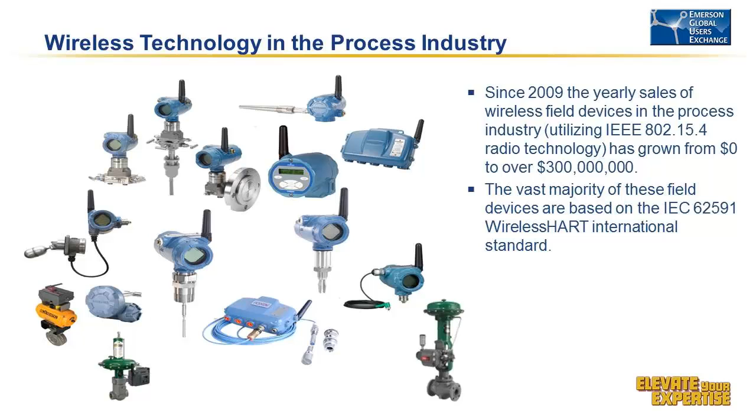Essentially, that market has gone from about 0 up to $300 million per year in a 6-year period of time. There are very few technologies that have taken off that fast in the industry. Part of that success is due to the fact that wireless and the way the gateway works makes it fairly easy to install, and it's fairly forgiving in terms of the installation.

If you have a straight line of sight, you can go quite a distance, but you don't have to have straight line of sight. You'll be hearing from Bailey about what's been done at UT, but you look at the installation there on wireless, and the gateway is in no way straight line of sight to any of the transmitters. There's quite a distance and obstacles in between. One of the nice things is with wireless you have reflection of the actual transmission that's going on, and through those reflections you really can get to points that aren't in the straight line of sight.

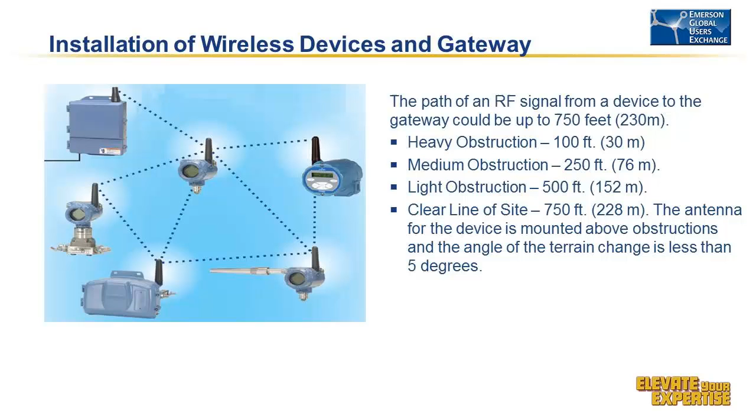When you look at wireless and you start setting up your wireless device, there are some choices in terms of communication. And if you're thinking about using that device in closed-loop control, then the two primary candidates for communication are something called the continuous communication. That means that the device wakes up periodically, senses the measurement, then communicates that, and then goes back to sleep. And it periodically then wakes up. The period that it wakes up, you get to specify. So that's your configuration parameter.

The other technique that is often used in control is window. It's similar to continuous in that the device periodically wakes up, but then at that point in time it says, has my measurement changed by more than a certain resolution? And if it hasn't, it doesn't communicate it unless it's been a certain period of time since the last communication. So that's called window. It always uses less power than if you're doing continuous. But one of the considerations is with window, you now have aperiodic communication of your measurement. And so your control has to be structured to be able to handle that.

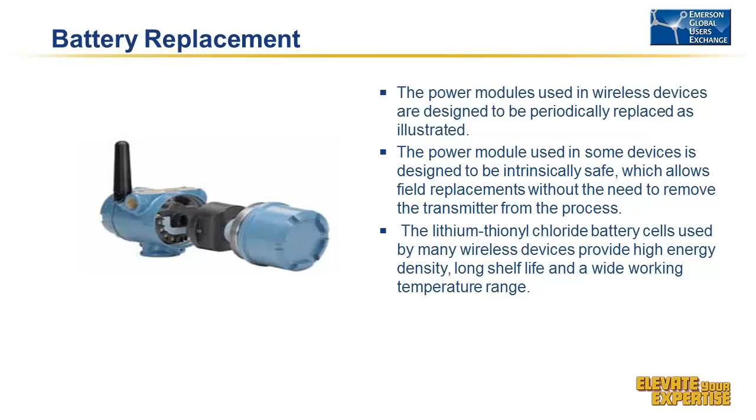Most of the devices out there today are battery powered. In terms of thinking about battery powered devices, this period of communication has a direct impact upon the length of time you can operate with that battery before you need to replace it. An awful lot of people that I've talked to have said they really want the battery to last 5 to 7 years. So if you look at this, you'll see that you really need to be setting up communication for about an 8-second periodic update if you're trying to achieve this 5 to 7 year battery life.

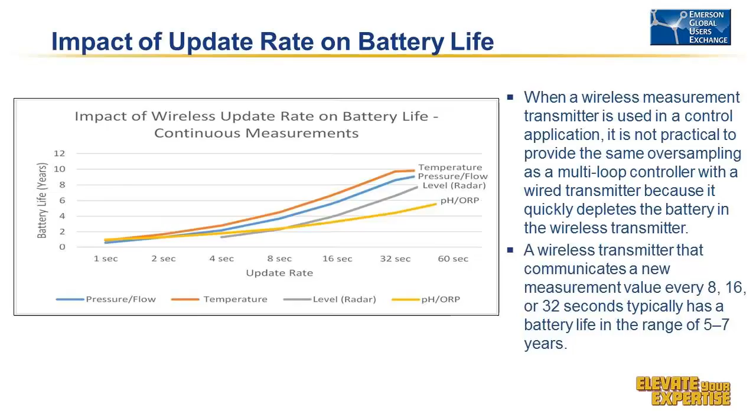Now, an 8-second update is quite a bit slower than what you have in your control system today. The recommendation is that over your process response time, that is the time from you making a change to getting to 63% of the change, you at least execute 4 times in control over that time frame. And in most of your DCS systems today, to minimize the delay between the measurement being taken and being used, we highly oversample the inputs.

So like in DeltaV, your analog input is being updated by your HART transmitter over 20 hertz, so about every 50 milliseconds or a little less. In DeltaV, the I/O on that is updated about every 50 milliseconds. So when the actual control executes, there's very little delay introduced by I/O access. But if you said, well, now I want to set up my wireless to do the same thing, you'd burn out your battery in a few days just due to the power that would be required.

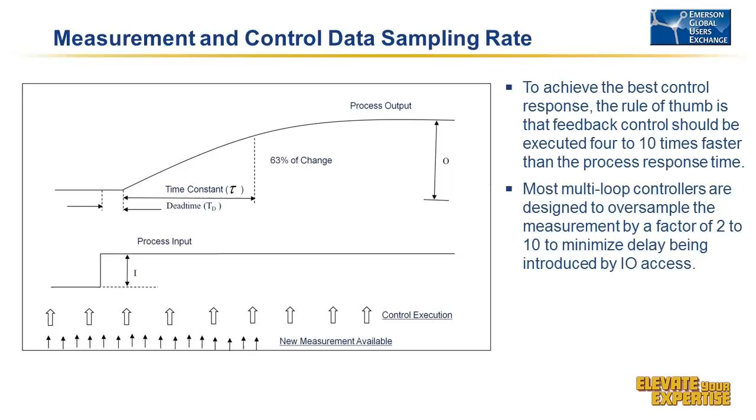So if you have a slower process application, though, where this 8-second update is giving you 4 updates over your process response time, then you see just using a regular PID, it doesn't do such a bad job. Okay, so let's say you had a process that was 30-some-odd seconds response time, then with an 8-second update period you could use regular PID and get away with it.

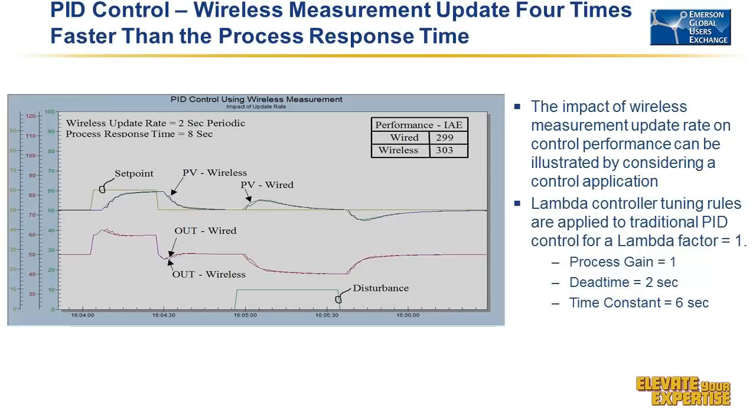But if you said, well, I really have processes like liquid flow, liquid gas, other things that are much faster, and you take the case where maybe your update is 2 times slower than the process response time. So let's say you had a liquid flow loop that's a 1 second response time and you're communicating it every 2 seconds. Then if you have it properly tuned, you look like this. Not so good.

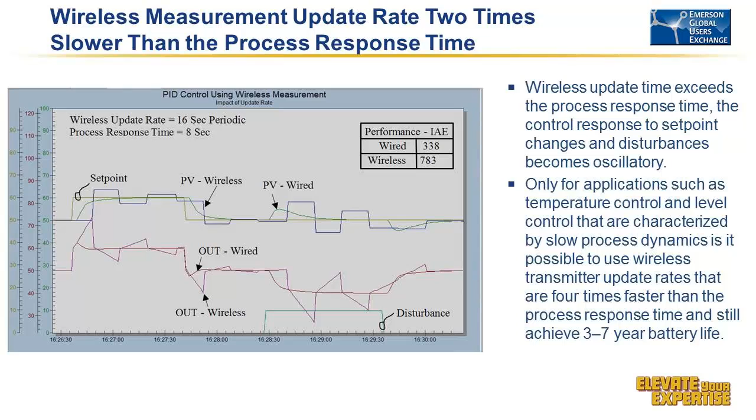Okay, so what do you do? Well, what I tell people is that up until now, the DCS has been designed and your I/O access with wires been designed where we could very successfully mimic analog control. So up to this point in time, the technology has been just designed to mimic analog control.

When we get into wireless, you really need to talk about a different control structure. And fortunately, there is one. By looking at the PID and looking at the way the reset is calculated, the derivative is calculated, you can restructure the PID to give you something called PID Plus capability. That means that your reset contribution and your derivative are only updated when you get a new communication. Your proportional continues to operate all the time.

Now, when you deal with this new technique, the actual PID needs to execute much faster than the actual communication rate. So if you had an 8-second update, you may be executing this every half a second, say. And the reason for doing that is to minimize the amount of delay you introduce into control. So as soon as the new measurement is in, you're using it. And so that's an important aspect of applying this PID Plus.

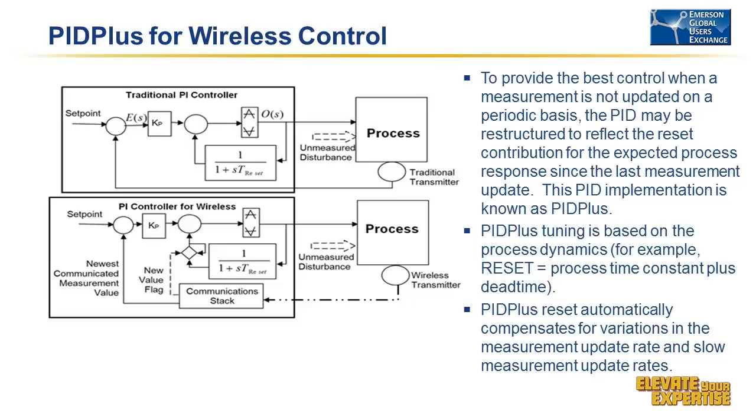But if you apply PID Plus, I think you'll find it gives you very comparable performance to what you get with a wired system. In this case, we're talking about using windowed communication, non-periodic update with a 1% resolution, really coarse update, 10-second refresh time, and yet you notice on a set point change, response looks very close to what you get with a wired. So we're comparing a wired transmitter with PID to wireless with PID Plus here.

You notice though on an unmeasured disturbance, it doesn't do quite as well in terms of recovery. But you notice every time you get a new measurement update, you're right where the valve would have been if you had had a wired installation with PID. Okay, so it does a good job. Not quite as well as you would get with a wired installation if you compare like integral absolute error.

But the important thing here is that in this example here, we only had 25 wireless measurement updates. With a wired installation, we had over 600 updates. So it shows that you can do an awful lot with fewer communications if you structure the PID in this manner. A concern oftentimes is loss of communication.

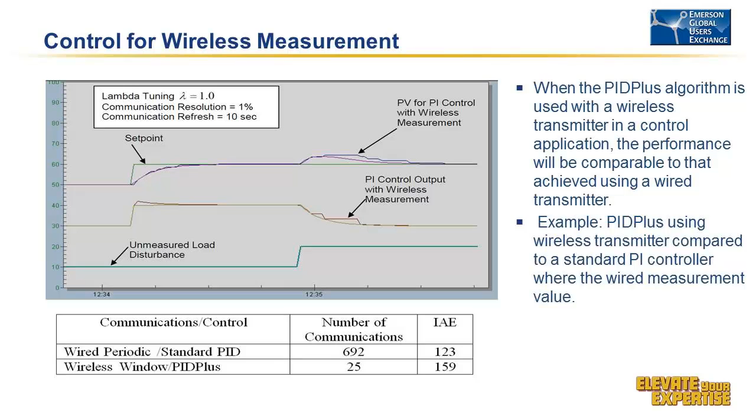So if you lose communication, the PID Plus really outperforms the PID because the PID, under the condition of a lost measurement, just continues to ramp the output with the reset action. With PID Plus, since it only updates reset contribution when you get a new measurement, it only updates or changes with the proportional error in terms of the output. And so it provides really superior performance on loss of communication.

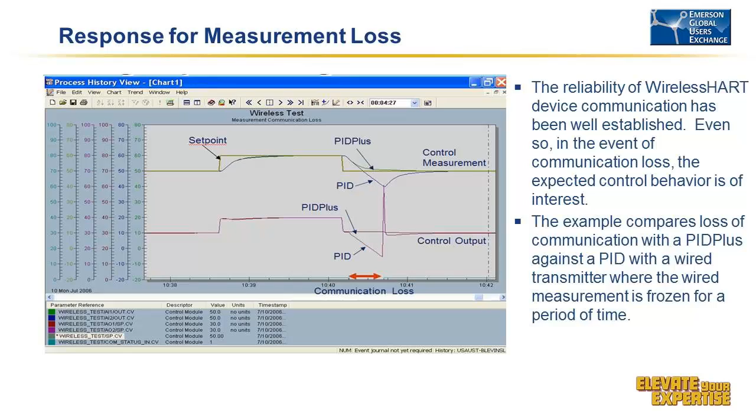PID Plus is a standard feature of DeltaV. So if you have DeltaV version 11, version 12, then it's just the PID option. You select PID Plus, and now suddenly you have that capability. So it's that easy in terms of turning on that capability.

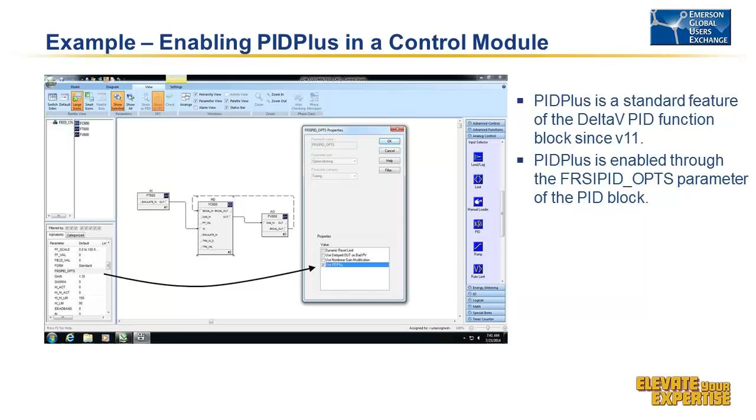But we wanted people to be able to use this regardless of what control system they had. And that's really in the best interest of our measurement division. They'd like to sell to anyone, no matter what system they have. So the patents that we have, and we have 3 patents on the technology, were given to FieldComm last year. That's the organization that really represents Foundation Fieldbus, HART, WirelessHART. So what that means is that as an end user, anyone can apply PID Plus without violating our patent as long as you're using WirelessHART for the transmitters, the field devices.

So after this announcement, I was approached by one of our major oil companies in upstream oil and gas. And they wanted to try this because they saw a lot of value in wireless control for upstream applications. The problem was in their research facility in Houston, their flow lab had LabVIEW as the control system. So I said, well, we'll work with you and we'll implement that in LabVIEW. So that's the sub-VI, the sub-virtual instrument that I created. That is PID Plus, 20 lines of code, to do PID Plus.

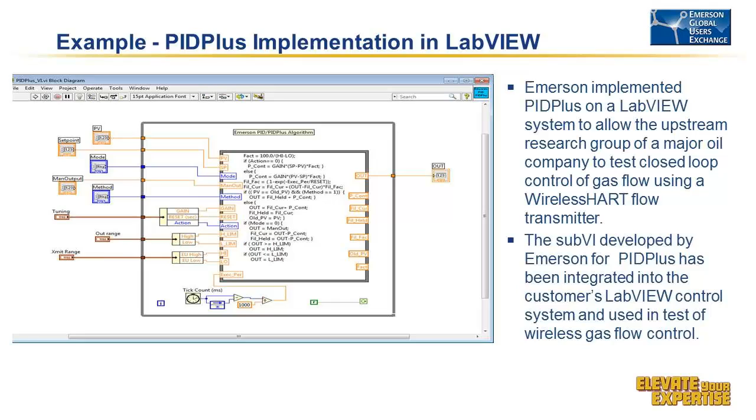So we gave that to them. They installed it in their flow lab. They tried it on a gas flow loop that had a response time of less than 3 seconds. They control that using 8-second update, continuous update. And this is the response from their flow lab. Okay, so that's for set point changes.

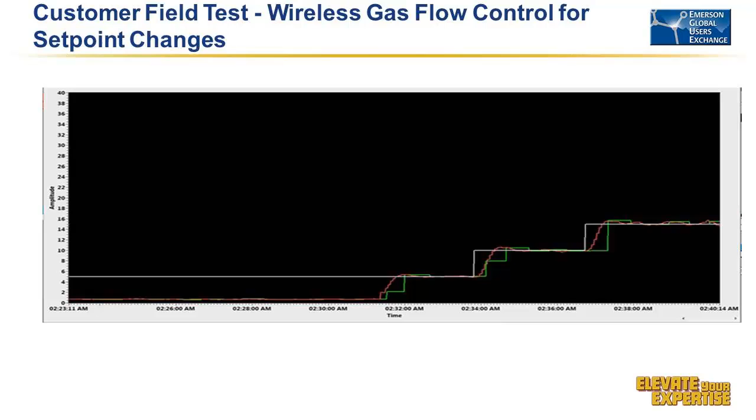So with this gas flow, they could introduce header disturbances. And so that's what they did to test disturbances. So that's the disturbance response. Not too shoddy there. So as a result of that, they've asked us now to implement PID Plus in the ROC platform, because they have standardized on ROC. And so Eric will be talking about that in terms of that interest in having that in the ROC platform.

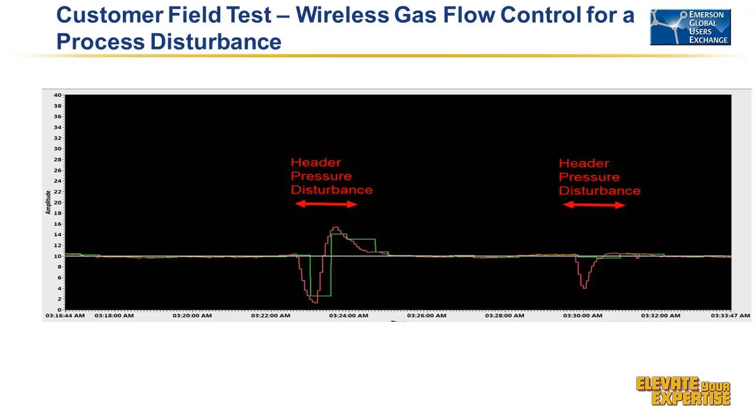Okay, so all this is sort of leading up then to guidelines, background information, understanding why the guidelines are there. Basically, if you're using a wireless transmitter and you want a 5 to 7 year battery life, you need to stick with about an 8-second update rate. Okay, so that's a recommendation.

The module that you're executing, the control end, should be executing much faster than that update rate. You don't want to introduce delay due to the fact that the measurement has come in, but the control isn't going to execute for 3 or 4 seconds, right? You want to take immediate action upon the new measurement as soon as it comes in. So we've sort of flipped the cart here. Previously in DCS, we were oversampling on I/O and executing control slower. Here we're executing the control extremely fast because the I/O is coming in at a very slow pace.

I would only recommend you use wireless if you don't have a requirement to respond to disturbances faster than your update rate. So let's say you pick 8 seconds and you tell me, Terry, if I have this disturbance, I need to respond in 4 seconds to it, then I'd say don't use wireless. Not a good candidate, right? But fortunately, for the vast majority of our applications, that doesn't apply. The fact that you need to instantaneously respond to disturbance oftentimes is not really a requirement for the control.

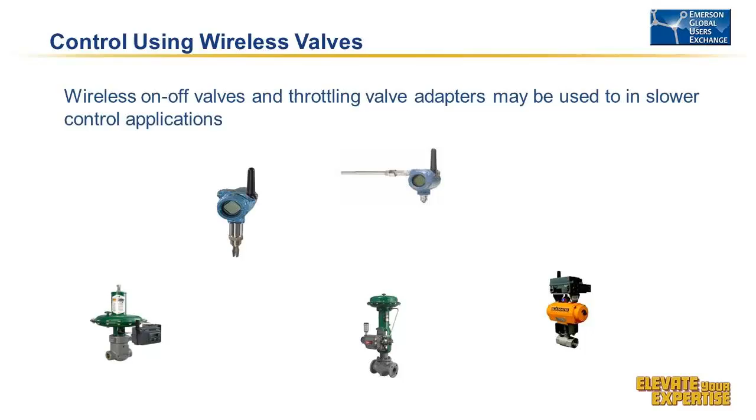Now, Curtis is going to talk to you about wireless valves. The discrete valve positioner wireless has been around for a while, the 4320. And there have been some good presentations here where people have used that. There's a new THUM coming out that now allows us to adjust the throttling valve. But in terms of applying those from a control perspective, there's some things that we need to take into account if you're thinking about using one of these. And one of them is you again need to execute the control much faster than the communication you expect to the valve, again, to minimize any delay.

And you need to, at least with today's technology, look at slower applications where the time to get down to the process doesn't impact you from an operations standpoint. Curtis will talk about that, but you can have a fairly significant delay going down. And we're doing some things like downstream publishing and time to apply command that will be coming out in the future, but they aren't here right now. So we need to, again, think about the loss of communication to the valve. And the valve is set up where you can actually configure it to hold last position or go to a position as part of what it does, rather than you having to tell it to do it.

So with that, I guess, to open it up to questions at this point. Anything? All perfectly clear?